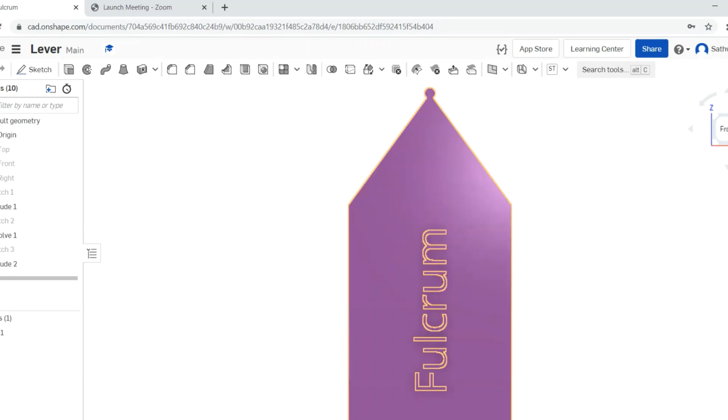This is a 4-part video series, so in each video I'm going to teach you. For the first 3, I'm going to teach you how to create a fulcrum, how to create a weight, and how to create your effort arrows and labels, and then your handle, and then the assembly. So essentially it's a 5-part video. Please stay on the lookout for all 5 parts. This is part 1, so let's get into the video.

This is how your fulcrum is going to look like. Remember, make sure you note down every single measurement that I'm going to tell you in this video, as they are very important for your handles so that it perfectly fits in every groove that you form.

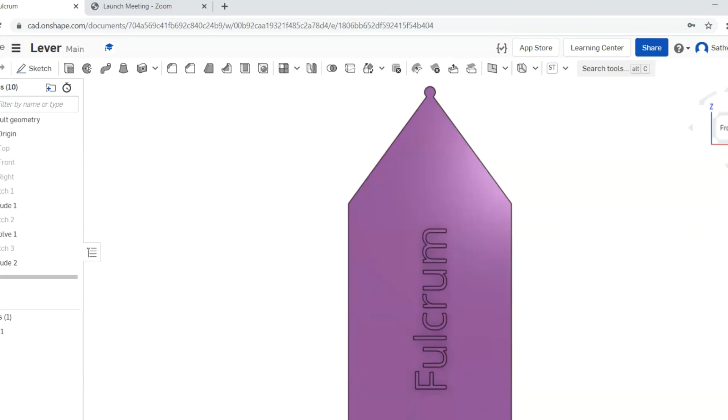Let's start off by creating a new part studio. That's going to be on the bottom bar. I'm going to click on the plus where it says insert new element, then create a new part studio. Okay, there we go, it's creating now. I'm going to right click and click rename. I'm going to label it Fulcrum tutorial, but you don't need to label it that.

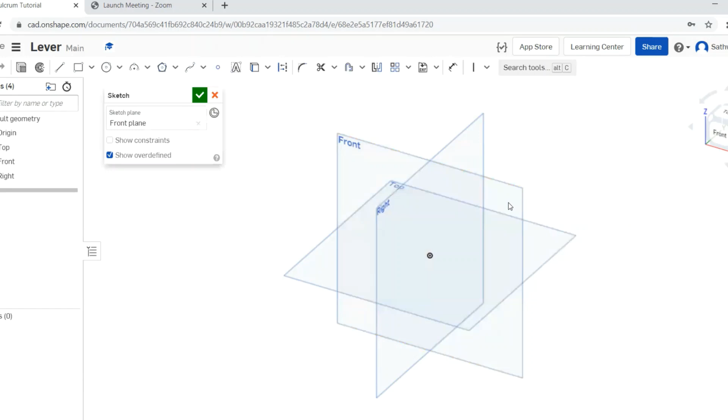I'm going to start off by creating a sketch on my front plane. I right click and click on sketch, then right click and go to view normal to sketch plane. Then I'm going to create an arrow. It doesn't need to be that precise, it can just be very brief.

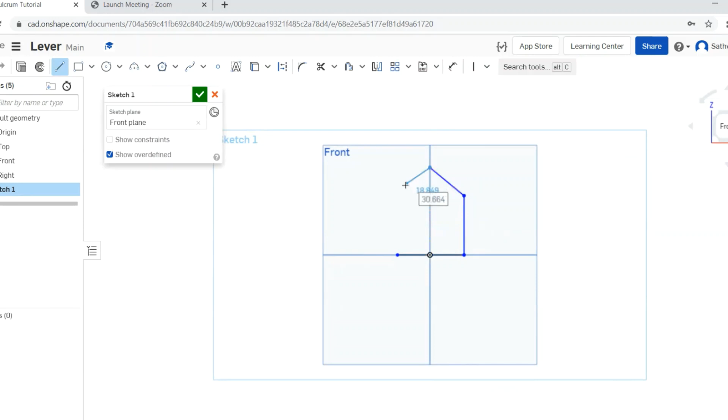So I'm going to draw my line here to here, then here, then here, then here. Basically the only restrictions for your base arrow are that your first baseline needs to be on the mark where the right plane makes, so it needs to be on this line, and your top point of the arrow needs to be on this line. That's basically the only restrictions you need.

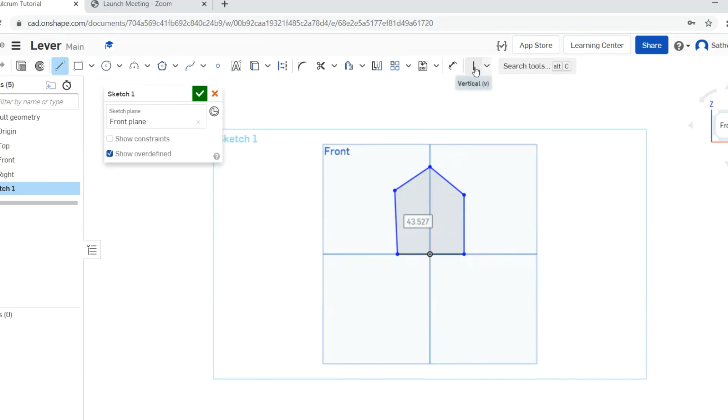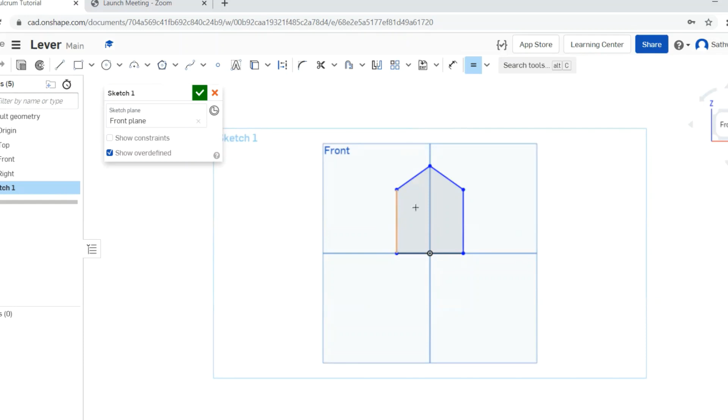Now we're going to start constraining. I'm going to go to my constraints button and click on vertical constraint, and vertically constrain both of these. Then I'm going to make these two equal, then make these two equal. It's very important that you do them separately so that they are in separate pairs. Two of these have the same dimensions and two of these have the same dimensions. Otherwise, it's going to be all wonky.

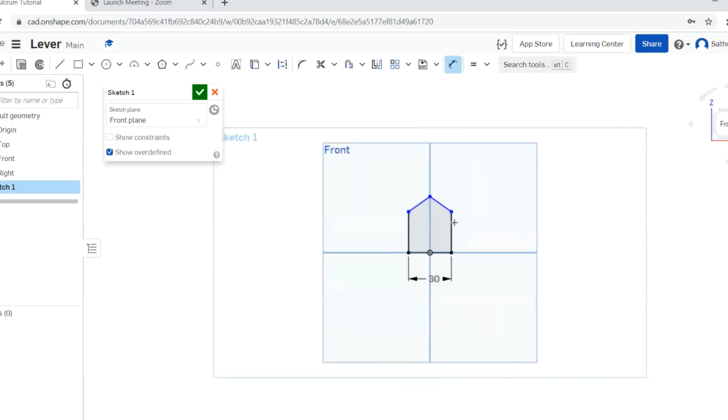So then I'm going to dimension it. I'm going to make my base 30, and make my sides 40. Notice how it automatically adjusts for both sides, as they're in equal constraints, so they're going to dimension together. I'm going to make the inwards thing sort of 25. As you can see here, it went inwards. That only happens when the point you drew is much, much lower than it needs to be.

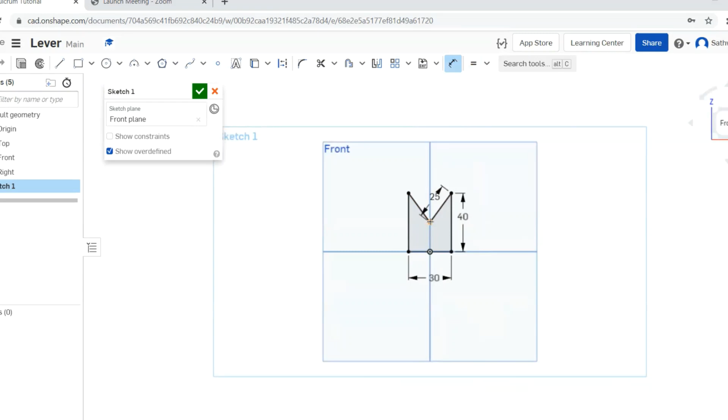Since this is not specifically constrained, I'm going to hover over this and click on delete sketch entity. I'm going to delete these 2 lines just because they look very terrible. There are some ways you can most likely fix them, but for the sake of this video and clarity, I'm just going to redraw them.

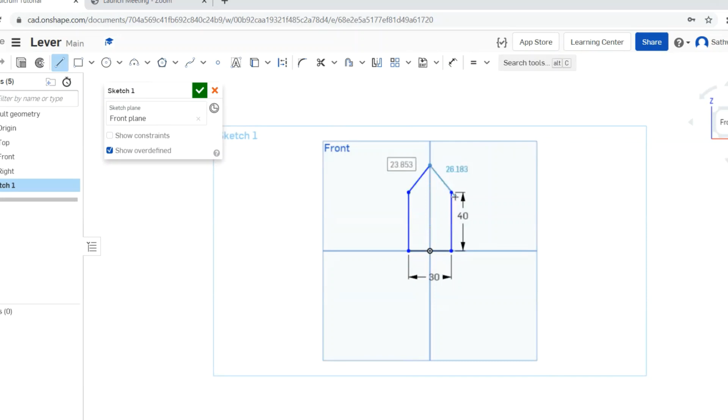Make sure you always draw your points high enough. Then I'm going to dimension them to 25. Oops, I forgot the equal constraint. Did I? Okay, I'm going to make this equal. Oh yeah, I did, okay that's okay. So this is all that you need to do for your arrow base.

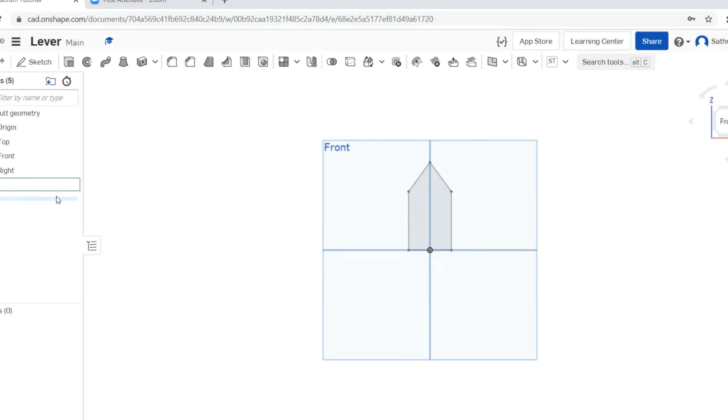Then I'm going to click the green check button, and rename the sketch. Right click and rename it base of arrow sketch of Fulcrum. Fulcrum is obviously my part that I'm going to be creating, so that's why I said Fulcrum.

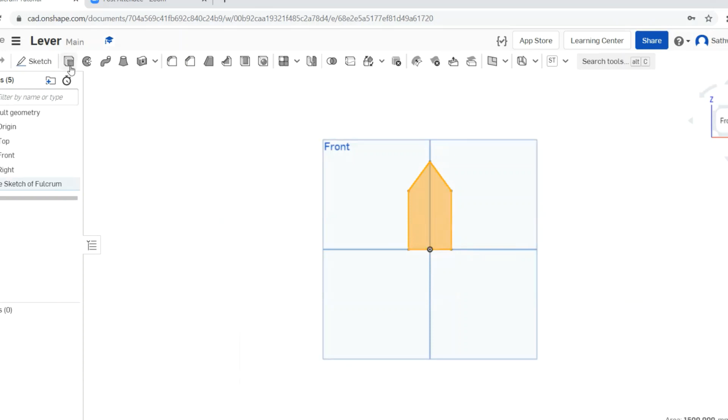So I'm going to first click on the arrow, click on extrude, and make sure it's on new. I want the depth to be 25 millimeters. If you haven't noticed already, I'm always working with millimeters now, so please make sure your units are in millimeters. Then I'm going to click the green check button, and check to make sure the extrusion was successful by going into isometric.

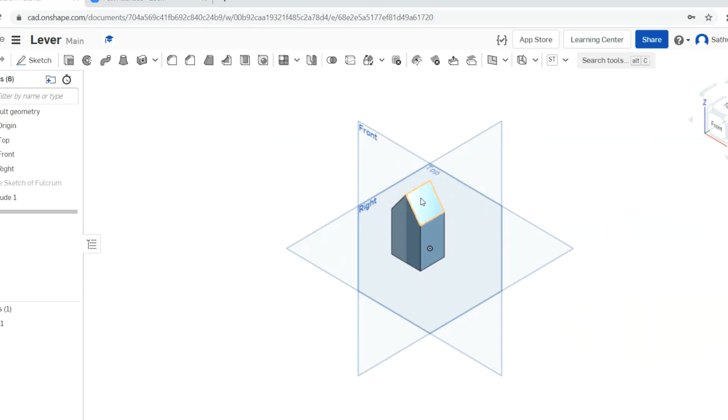Yay, it's perfect. So now what I'm going to do is draw a corner rectangle up here, right here, so I can revolve it around. Basically how that's going to look is this little circle over here, this little cylinder that is arcing over your fulcrum. That's what the small rectangle is going to create.

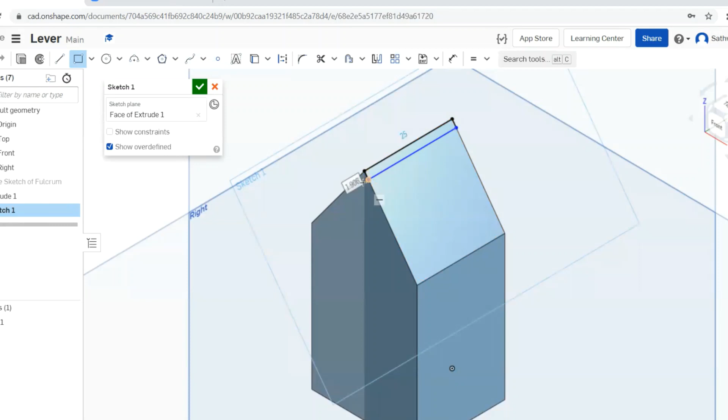So I'm going to zoom in, and make a sketch on this plane. You can either do it on the left or the right, I prefer the right. I'm going to make my corner rectangle from this point to the second point. Don't worry about the non-precision with the dimensioning, we can fix that. We're going to go to dimension, and make this 1 millimeter.

Remember, always note down all of your measurements that you're using so that you can make sure the grooves fit perfectly, so that the holes fit perfectly in the grooves.

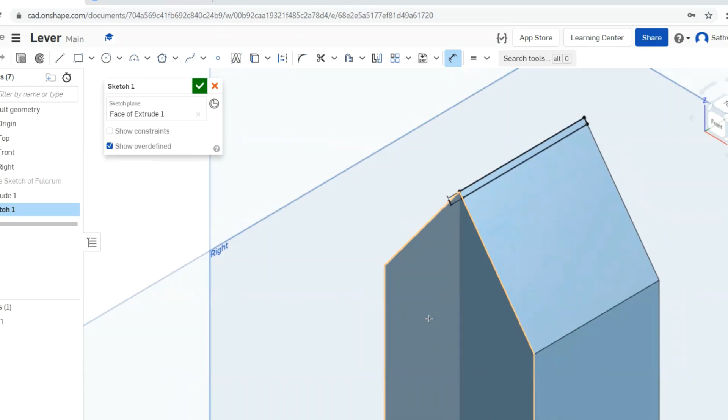Holes fit perfectly in the grooves. Okay, we're going to revolve this now. So this is all for the sketch. I'm going to go to revolve.

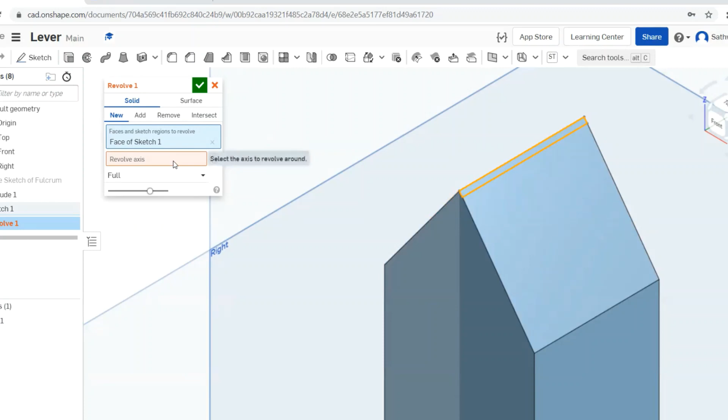I'm going to select the rectangle, and it's going to ask for a revolve axis. When I click on revolve axis, the whole sketch becomes blank, but it's still selected. If you're in faces and sketch regions to revolve, it's going to ask for the rectangle because we're revolving the rectangle. But when we go to revolve axis, it's just asking for a singular line that it wants to revolve around. So I'm going to choose the top line.

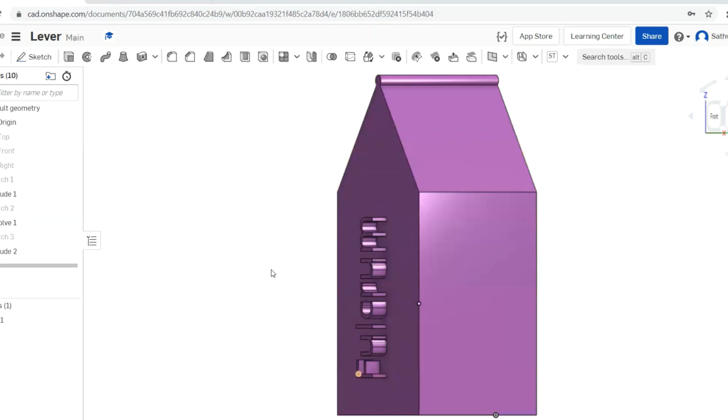I want to make sure my merge scope is with part 1, which is the base arrow. This part 1 is the arrow, the base arrow. I also want to make sure that it's an add, so that this revolution can be added onto the part, so it's still all one part. Then I'm going to click the green check button, and there we go.

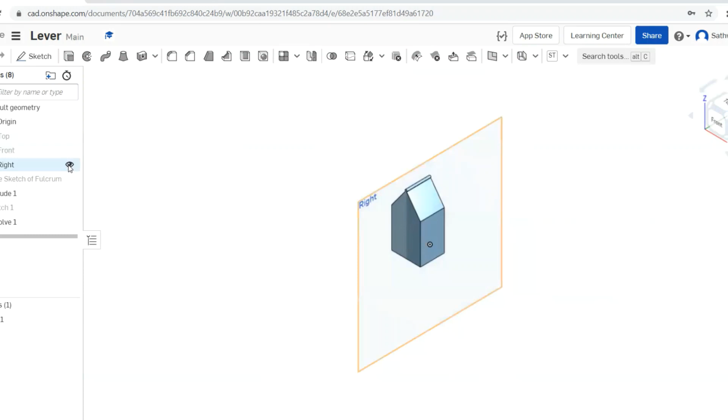I'm going to go back into isometric, and I'm going to hide all of my planes so that it's a bit more clear about this step. Now this step can be a bit challenging if you don't follow it carefully. So I'm going to now label it. If you go back to my base model and go into isometric, you can see that I have it labeled.

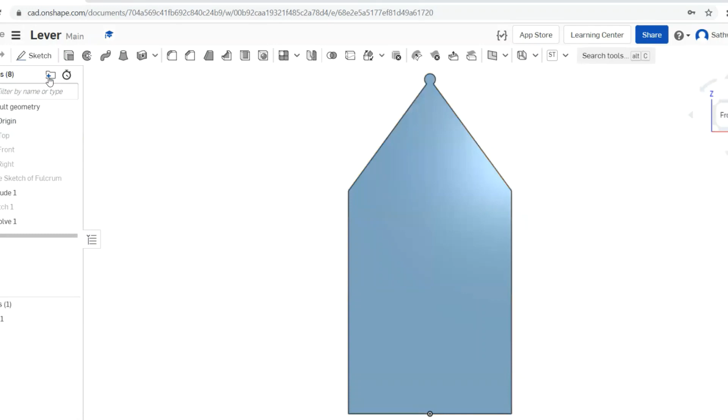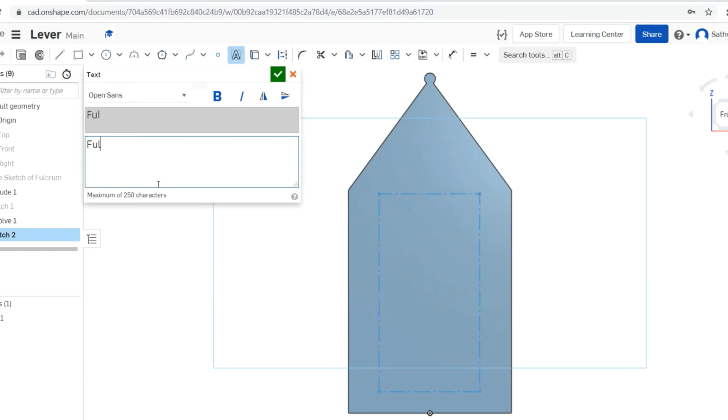I'm going to make a new sketch on the front of this arrow, then go to the text option. I'm going to click and expand, and then it's going to give me this pop-up. I'm going to type in Fulcrum and click the green check button.

As you can see here, it extends very large, so don't be worried about this, it's completely fine. What I'm going to do first is dimension the top edge to 25 millimeters. It's going to be massively smaller, don't worry.

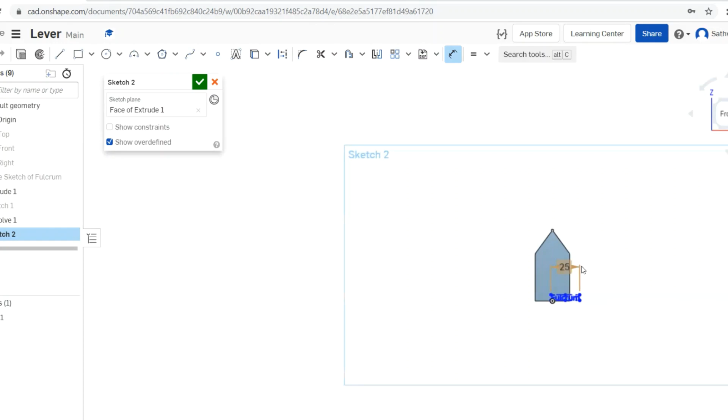Now that that's done, let's go back and recenter. What I'm going to do is come out and make this bottom line vertical so that it rotates the text face to face here, not horizontal but vertical. Remember that it's only going to show you this for the bottom line.

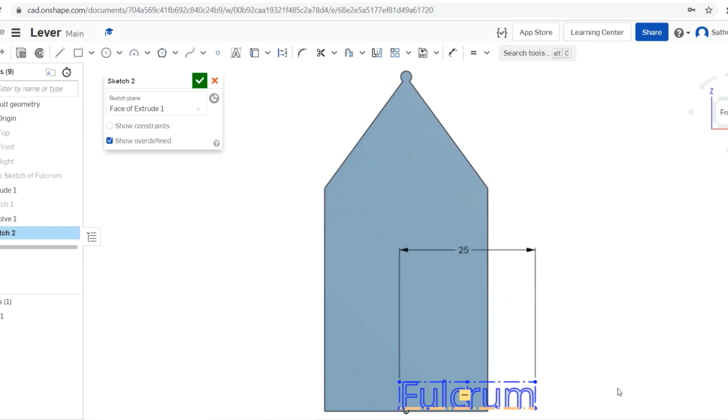When you hover over the bottom construction line of your text, it's going to give you this horizontal constraint. Right click and click on delete. Unselect your baseline, just make sure you're selecting the constraint, otherwise it's going to ask you to delete 2. You only want to delete 1. So click on delete sketch entity, then go into your constraints, click on vertical constraint, and click to make this vertical. There we go.

Now what we're going to do is center your text. We're going to go into dimensions, make this construction line, make the distance between the construction line to the edge of this arrow... I wanted to make it 12 millimeters, sorry.

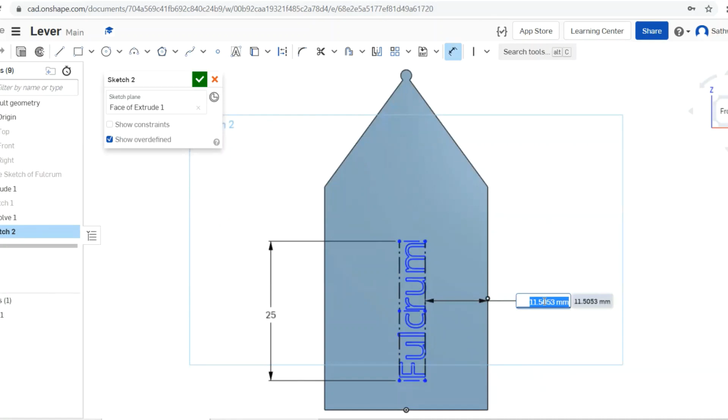So if I make it 12 millimeters, then how I'm going to make my text a bit larger - it seems a bit too small, so I'm going to make it 30. As you can see here, the distance between the base of the text and the base of the arrow is too close.

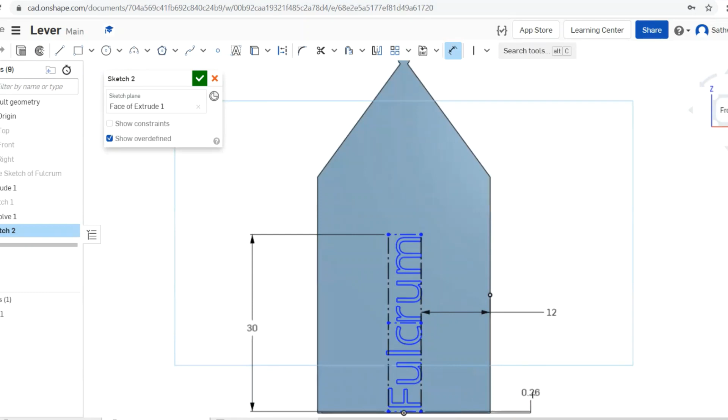So I'm going to select this text construction line to the bottom of this arrow, make sure it highlights orange. Then I'm going to make the distance 10 millimeters, so it moves up. There we go, so this is what we want. I'm going to finish my sketch.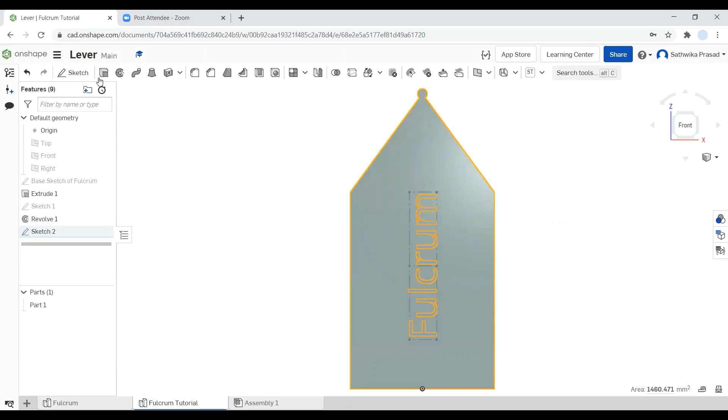I'm going to go back to my front plane, and I'm only going to select the text - only the text. I misspoke before, I only want to select this text. Then I'm going to click on extrude. It should give you this really weird color - that's how you know. Make sure it's an add. We are going to go to isometric to make sure. Why is this acting so weird?

Why is this acting so weird? This is strange.

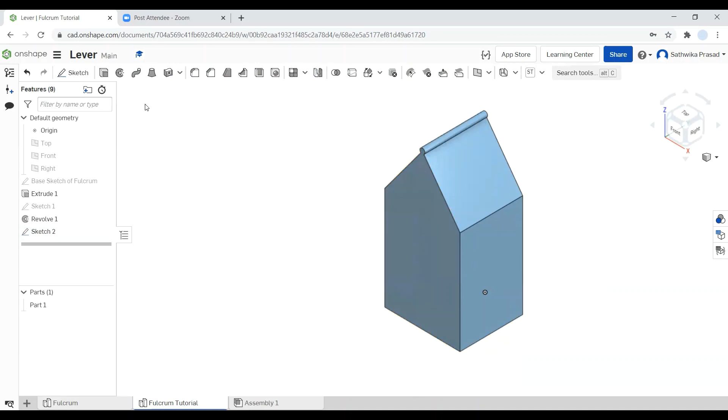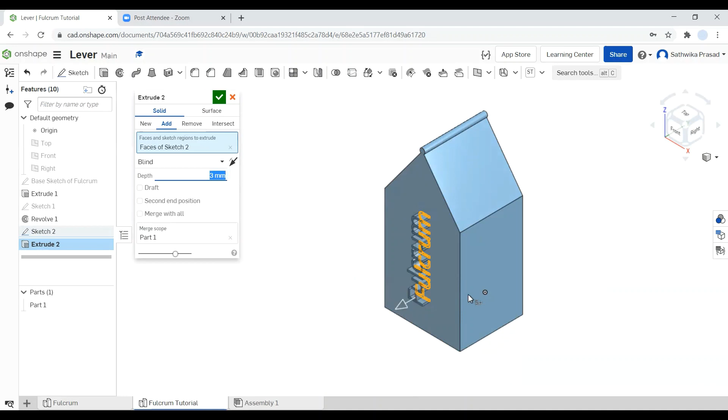Yeah, there you go. So you just want to make sure you only select the fulcrum, otherwise it's going to extrude the entire face, which is not what we want. I want the extrusion depth to not be this large, obviously. I'm going to make the extrusion depth 3 millimeters, just going to make it this small. Then you click the green check, and that's how you make your fulcrum piece.

What I actually want to do before I let you guys go is change the color of this fulcrum. Remember, we're going to be assembling in the same document, so it's going to get a little confusing with all of the parts. So it's better to just color code.

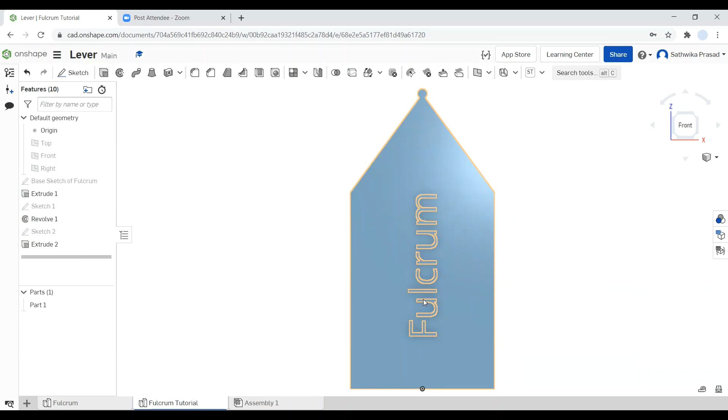I'm going to go to my parts tab, right click, and first rename it to fulcrum. Then I'm going to right click and click on edit appearance. I'm going to make it this nice purple color, so whenever I see a purple color, I know it's got to be the fulcrum.